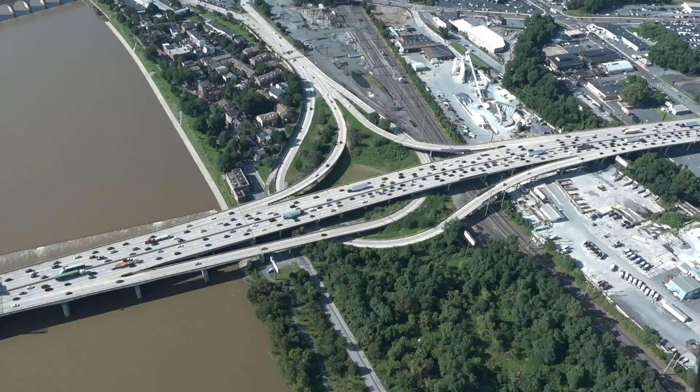Welcome, and thank you for taking the time to learn about the I-83 East Shore Section 2 and East Shore Section 3 projects. Over the last year and a half, the Pennsylvania Department of Transportation and the Federal Highway Administration have met with the Tri-County Regional Planning Commission, local municipalities, and other transportation stakeholders to gather input to aid in the preliminary engineering phase. This video will provide an introduction and history of these important projects in the Harrisburg area and will present the recommended preferred alternative for each section that have been developed through the alternative analysis process.

The project team values your interest in these I-83 projects and will continue to work with the community to minimize impacts and future disruptions while improving mobility and safety for all modes of transportation in the area. The projects are located on Interstate 83, a key link in the Capital Beltway, which encircles the city of Harrisburg. As part of the National Highway System, I-83 serves as an important transportation hub connecting people and products. I-83 is also an essential travel corridor for people who live and work around the greater Harrisburg region.

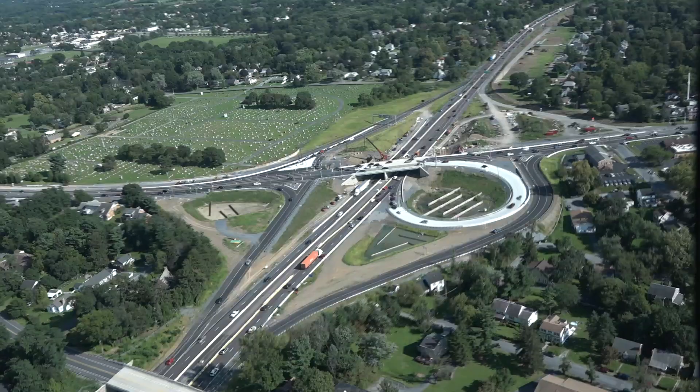The East Shore Section 2 and 3 projects are part of a series of improvements that were identified as part of the I-83 Master Plan completed in 2003. The purpose of the Master Plan was to identify transportation projects that would improve traffic operations and safety by providing an upgraded transportation facility that better serves its users. The plan established 4 sections along an 11-mile corridor between Interstate 81 and the York Split. The first of these sections, East Shore Section 1, which extends from the I-81 junction to south of the Union Deposit Interchange, is currently under construction. Construction is anticipated to extend through 2021.

The East Shore Section 2 project begins at the southern limit of East Shore Section 1, just south of Union Deposit Road, and continues along I-83 to the 29th Street Bridge overpass and includes the Eisenhower Interchange and portions of I-283 and US 322. The East Shore Section 3 project proceeds from the 29th Street Bridge overpass and continues south along I-83 to the Susquehanna River.

The West Shore section is the last of the 4 identified projects from the Master Plan. In 2015, the I-83 PA 581 Interchange Bottleneck Safety Project was completed in this area to relieve congestion and reduce the frequency of crashes. The Master Plan proposed additional long-term improvements, which include construction of a full-system interchange with PA 581.

The Section 2 and 3 projects are in the early stages of preliminary design and will address similar needs as Section 1, including aging infrastructure, chronic congestion, and safety concerns from existing outdated design features. Motorists on the interstate confront traffic incidents, difficult merge and exit maneuvers, and maintenance activities on a daily basis. The original pavement and bridges that were built in the 1960s have deteriorated to the point where total replacement is required. Additionally, by the year 2050, traffic volumes in some areas of the highway are projected to grow from approximately 110,000 to more than 150,000 vehicles daily.

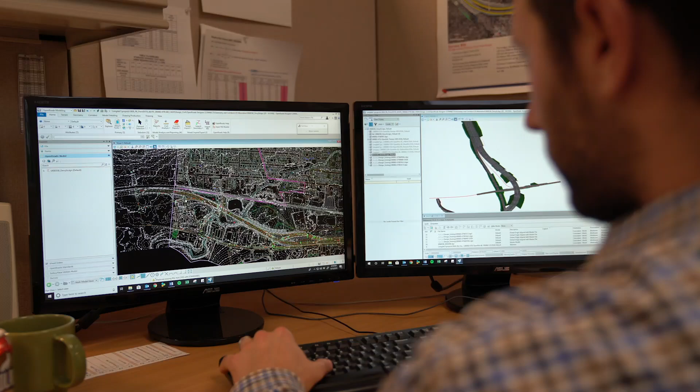PennDOT has worked closely with its consultant teams to develop and evaluate numerous alternatives, including options based on conceptual designs conceived as part of the I-83 Master Plan. Alternatives were developed utilizing current design standards, detailed traffic and survey information, environmental data collection efforts, along with input from community stakeholders. The project team has conducted numerous stakeholder meetings with adjacent municipalities, local schools, emergency service providers, Capital Area Transit, and the Capital Area Greenbelt.

Studies have included the identification of natural, cultural, and community resources, the examination of existing and future traffic volumes, the evaluation of where traffic is coming from and going to through origin-destination studies, and the evaluation of traffic control and construction sequencing. This detailed information has helped the project teams to develop and evaluate the preliminary design alternatives, resulting in a recommended preferred alternative for each project that addresses the project needs and minimizes impacts.

The challenges along the I-83 corridor include a densely populated area with many businesses, schools, community facilities, residences, historic and environmental resources. PennDOT's overall goal is to avoid or minimize impacts to these sensitive features when possible. Additionally, the National Environmental Policy Act requires the Federal Highway Administration and PennDOT to demonstrate and document how any required impacts to these resources will be minimized.

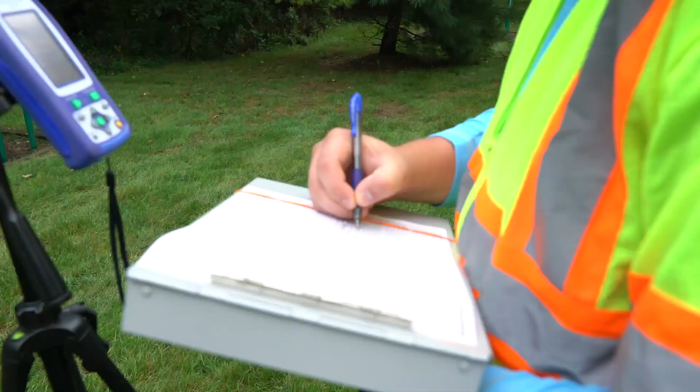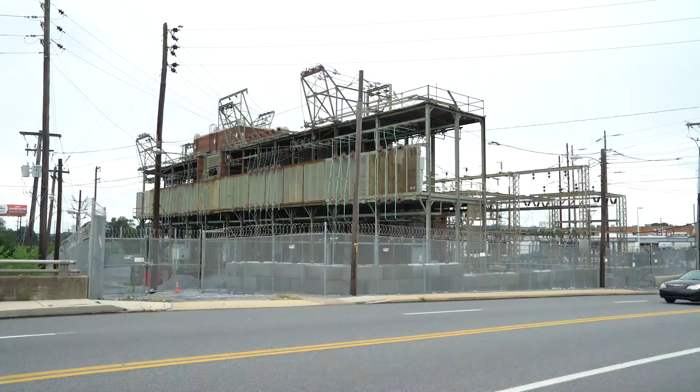The project areas contain historic resources that are listed on the National Register of Historic Places and additional properties that are eligible for listing. Natural resources, including waterways, wetlands, and endangered species, are also present and have been taken into consideration. Air quality and noise study areas were also identified and will be further evaluated as preliminary engineering progresses. Utilities and railroads, such as Norfolk Southern and Amtrak, also present challenges. Utility and railroad impacts can be costly and time-consuming.

Traffic analysis and maintenance of existing traffic patterns during construction had an important role in the development of alternatives and the evaluation of complex interchange dynamics. Traffic studies demonstrated the benefit of separating traffic with destinations in the Harrisburg area from motorists traveling through the region on I-83. As a result, the project teams are using designated lanes, also called a collector-distributor or CD system, in certain portions of the design. To improve safety and travel flow, through traffic will be separated from traffic merging on and off the interstate.

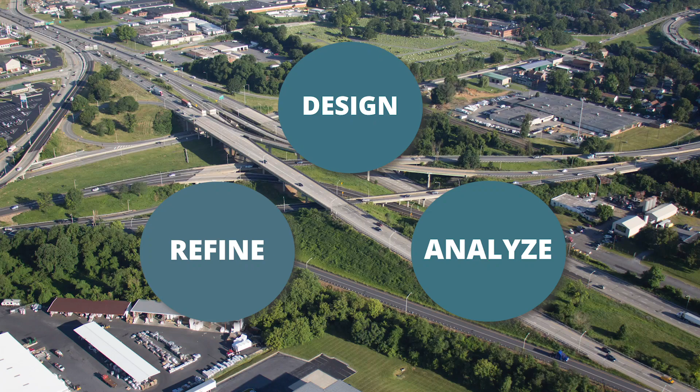Once all the challenges were identified, a cycle of designing, analyzing, and refining was used to develop, evaluate, and compare alternatives, resulting in a recommended preferred alternative. Impacts that may affect property owners, community facilities, and environmental resources will be further defined as preliminary engineering continues. If impacts are unavoidable, PennDOT will consider ways to minimize and address the impacts caused by the projects.

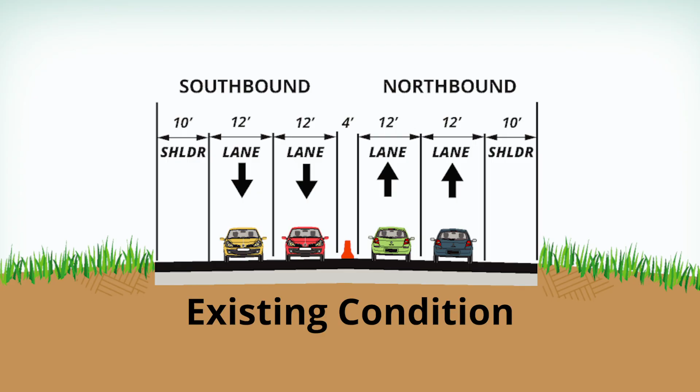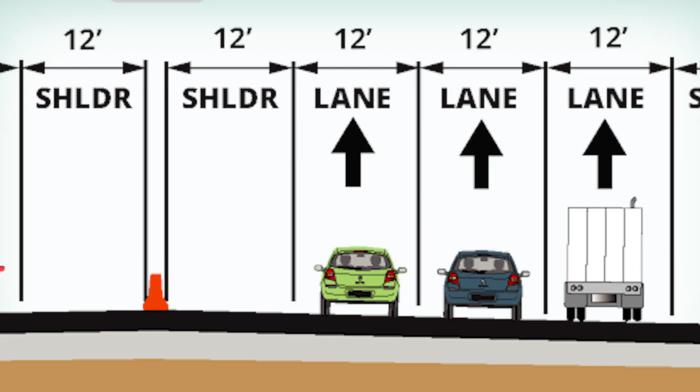The recommended preferred alternative for the I-83 East Shore Section 2 and Section 3 projects increases the existing number of lanes on I-83 to a minimum of 3 mainline travel lanes in each direction with a 55-mile-per-hour speed limit. To improve safety, the I-83 roadway for both sections includes widening the existing narrow median to utilize 12-foot median shoulders separated by a concrete barrier and 12-foot minimum outside shoulders. In addition, East Shore Section 3 and a portion of East Shore Section 2 utilize a collector-distributor system to serve local roads and intersecting highways.

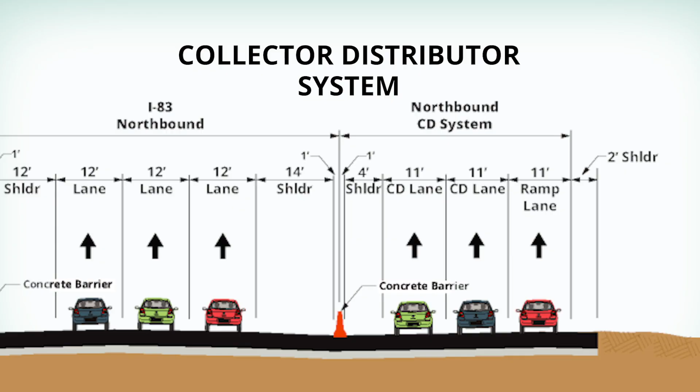To improve pedestrian and bicycle accommodations for the local roadways crossing I-83, the projects include widened shoulders and 5-foot minimum sidewalks. Taking a closer look at the preliminary design of the recommended preferred alternative, we begin at the Susquehanna River, which is the western limit of East Shore Section 3. Within the East Shore Section 3 project, improvements are proposed at the following interchanges: 2nd and Front Streets, a new interchange at Cameron Street to replace the 13th Street interchange, and the split interchange at 17th and 19th Streets.

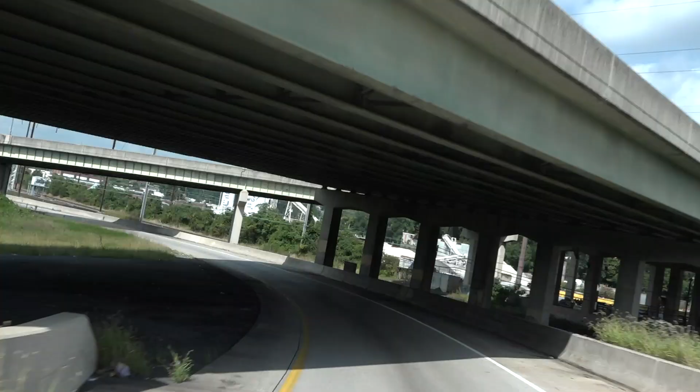The 2nd and Front Street interchange makes similar connections to I-83 as it does today. However, the northbound ramp connecting to 2nd Street will be realigned and widened to 2 lanes. The new ramp, shifted slightly to the south, provides the required clearances under I-83 and results in less travel impacts during construction. Other ramp improvements at this interchange will be constructed on the existing alignment. Just to the east of the interchange, the I-83 mainline collector-distributor system begins with 3 through lanes and 2 CD lanes to accommodate the local connections.

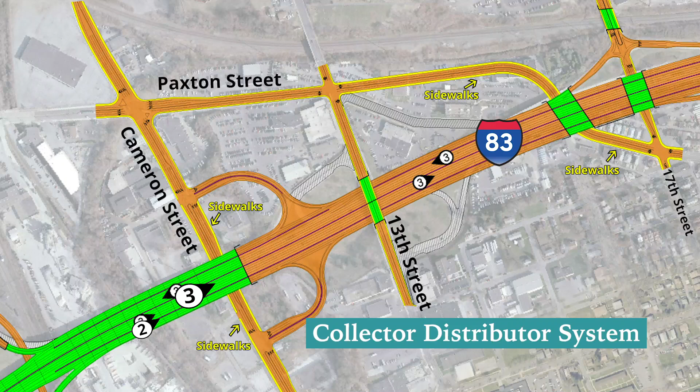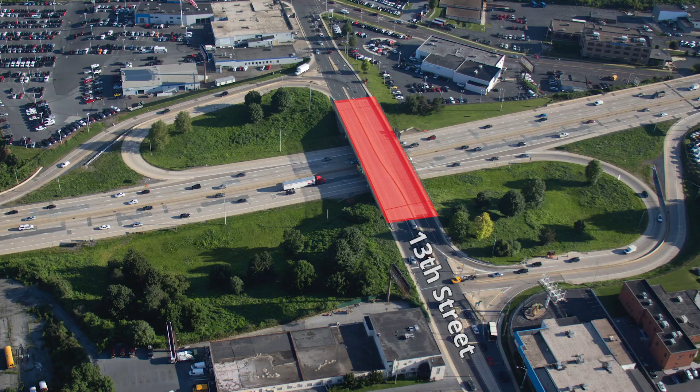Cameron Street connects directly to I-83, replacing the existing connection at 13th Street, providing easier access to downtown Harrisburg. Access from Cameron Street to I-83 northbound and southbound is provided using a partial cloverleaf design. The new connection provides direct access to the main north-south route, Cameron Street, and reduces traffic near Foose Elementary School at 13th Street and Sycamore Street. The 13th Street Bridge over I-83 is replaced to maintain the existing local connections across I-83.

Paxton Street is realigned between 16th Street and 13th Street, improving the alignment at the 13th Street intersection and reducing the size of the I-83 bridge over Paxton Street. Also in the vicinity of 13th Street, a ramp is provided in the southbound direction for local traffic to access I-83. Cameron Street will be widened to accommodate turn lanes and includes pedestrian and bicycle accommodations. Based on community input to preserve the existing local, residential, and commercial traffic patterns for access to I-83, the 17th and 19th Street interchange maintains the existing ramp configurations.

Both the mainline I-83 bridge over 17th Street and the 19th Street overhead bridge will be replaced. In addition, 17th and 19th Streets cross over the Norfolk Southern Railroad. These bridges are also being replaced, including improved bicycle and pedestrian accommodations.

As the northbound on-ramp from 19th Street joins I-83, the division between the main line and the collector distributor lanes merge to create 5 lanes northbound. Similarly, in the southbound direction, the main line will transition from a 4-lane section to 3 through lanes and a 2-lane CD road. This configuration continues from this area to the eastern limit of the East Shore Section 3 project at

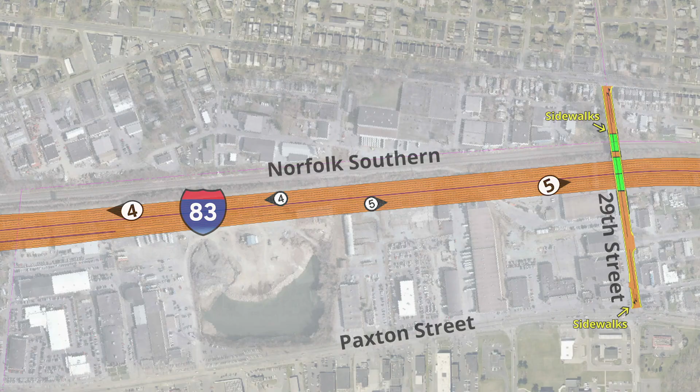the 29th Street overpass. The alignment of I-83 is shifted to the south to reduce potential impacts to the historic railroad property. To accommodate the widening and alignment shift, the 29th Street Bridge is replaced and will include improved pedestrian and bicycle accommodations.

From the 29th Street Bridge, the East Shore Section 2 project begins and extends to just south of Union Deposit Road. A focus of this section was to better the local roadway network that currently is limited due to the highway and railroad corridors dividing the area. Within the project, improvements will be made at several interchanges, including Paxton Street, the Eisenhower Interchange, and Derry Street. Additionally, local road connections to the east and west of the Eisenhower Interchange will be enhanced.

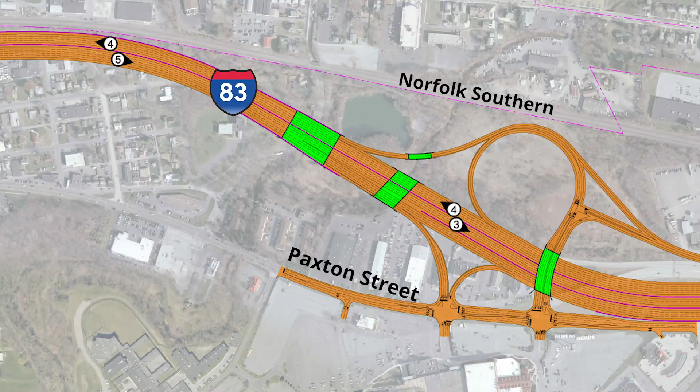East of 29th Street, I-83 continues with 4 lanes in the southbound direction, while northbound I-83 transitions from 5 lanes to 3 through lanes and a multi-lane collector-distributor system. All northbound motorists traveling to Paxton Street, I-283, US 322, and Derry Street will utilize the CD system to separate from mainline I-83 traffic.

The main line in this area was designed to minimize impacts to several historic, natural, and community resources. These include the historic Spring House, the Capital Area Greenbelt, the Rutherford House, and Paxtang Park.

East Shore Section 2 includes a complete redesign of the I-83 Paxton Street interchange near the Harrisburg Mall. The existing northbound 32nd Street and Wayne Street ramps will be eliminated. Instead, motorists traveling northbound will access Paxton Street via ramps connecting to the collector distributor system. These ramps will tie to Paxton Street at the current signalized location of the Harrisburg Mall's main entrance.

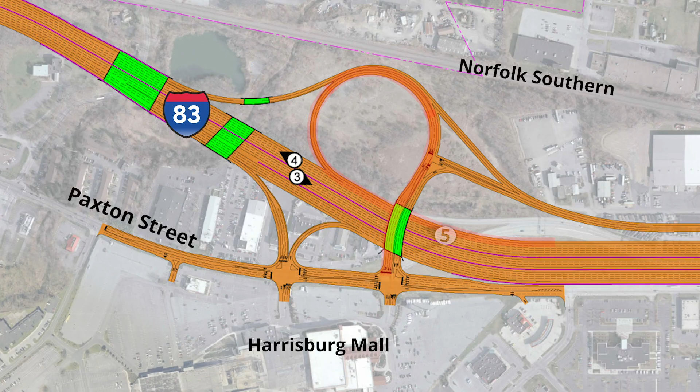Those traveling southbound will utilize a new loop ramp to access Paxton Street. The southbound off-ramp to Paxton Street will have a dedicated lane on I-83, creating 5 lanes southbound until the exit. The ramp to Paxton Street will cross over I-83 utilizing a new bridge. These southbound ramps will tie into Paxton Street at the signalized intersection located at the current Bass Pro Shop entrance.

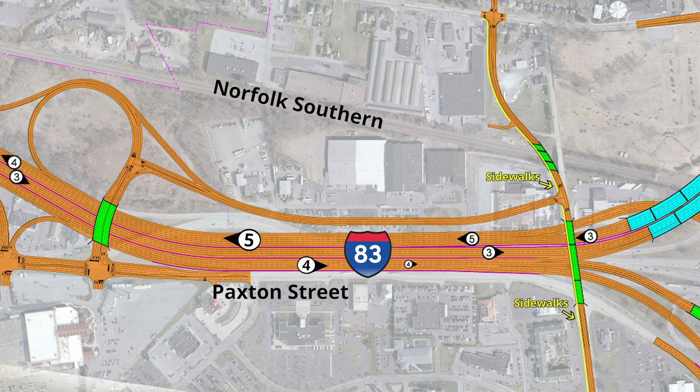Heading north, I-83 parallels Paxton Street, continuing 5 through lanes southbound and 3 through lanes plus the multi-lane collector-distributor system northbound. Approaching the Eisenhower interchange, the 3 northbound I-83 through lanes remain and the CD system will end with the lanes splitting to provide 1 lane that will join the other I-83 through lanes, 2 lanes to access US 322 eastbound and Derry Street, and 2 lanes to access I-283 southbound.

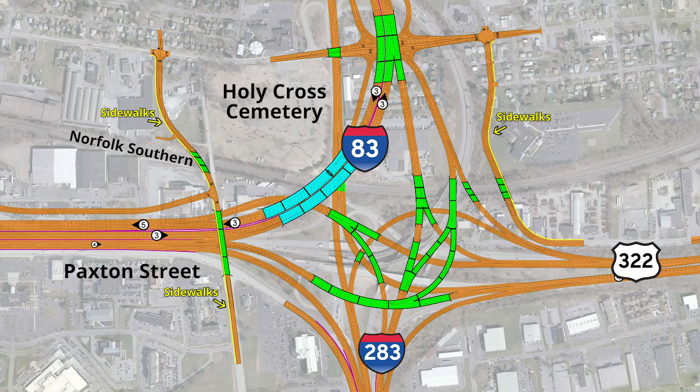The East Shore Section 2 project includes the redesign of the Eisenhower interchange. All the existing ramp movements will be reconfigured. Mainline I-83 will be shifted to the west between Holy Cross Cemetery and the interstate's current location, utilizing flyover bridges to span over the existing historic railroad property and new interchange ramps. Each direction of I-83 will carry a total of 4 lanes on these structures, including 3 through lanes plus a single lane ramp.

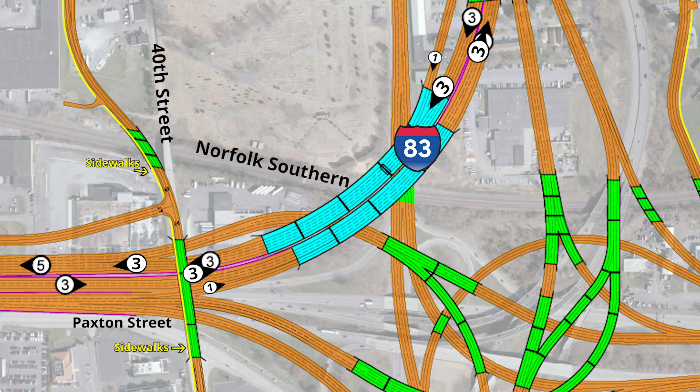Just north of the Eisenhower interchange, the partial interchange with Derry Street will be completely redesigned. The existing ramp configuration will be replaced with a single-point urban interchange, or SPUI. This type of interchange requires relatively narrow right-of-way and has the advantage that opposing left turns occur at the same time through a single traffic signal, and right turn movements are typically free-flow or yield-controlled.

All movements accessing Derry Street from I-83 will pass through this traffic signal, with mainline I-83 spanning over the intersection. This interchange will provide full access to and from Derry Street for I-83, I-283, and US 322.

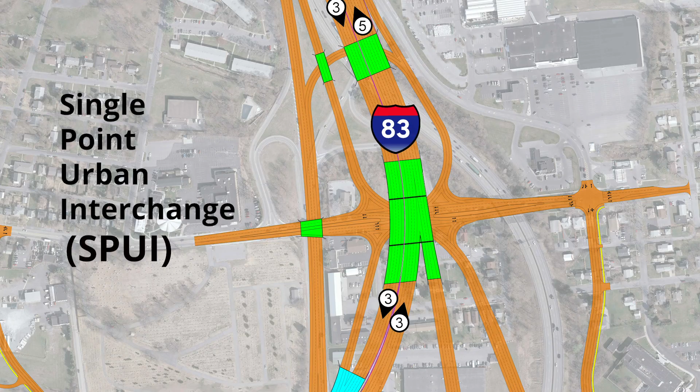As part of the redesign of both the Eisenhower and Derry Street interchanges, the two-way portion of Eisenhower Boulevard between I-83 southbound and Paxton Street will be replaced with an interstate ramp connecting I-83 southbound and Derry Street to both I-283 southbound and US 322 eastbound.

Eisenhower Boulevard will remain in its current configuration south of the intersection with Paxton Street. The existing signalized T intersection between Paxton Street and Eisenhower Boulevard will be removed and realigned to create a continuous roadway. With a change to Eisenhower Boulevard and need for an improved local roadway network as noted during public outreach, 2 new connections will be built in the vicinity of the Eisenhower interchange.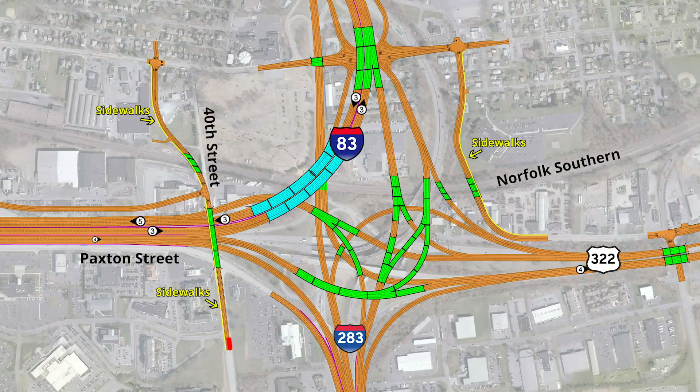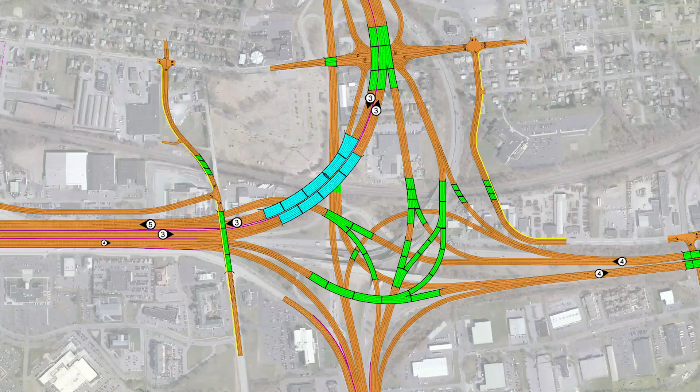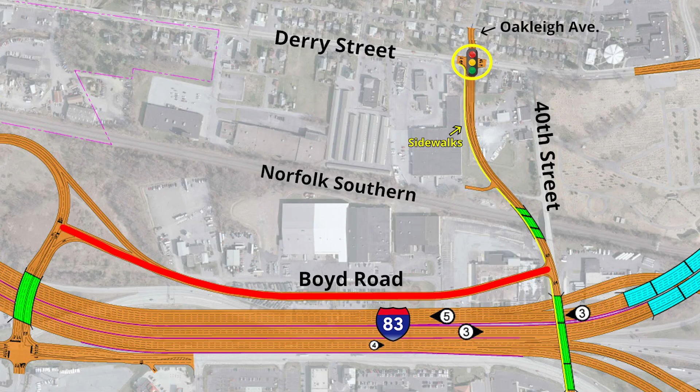On the west side of the Eisenhower interchange, existing 40th Street will be realigned and improved to include a bridge that crosses over I-83 and the railroad, providing a needed connection between north and south of I-83. The improvements include a new signal at the realigned intersection with Derry Street. Existing Boyd Road will be realigned and improved to provide a connection between 40th Street and the new Paxton Street interchange. The second north-south connection will be on the east side of the Eisenhower interchange.

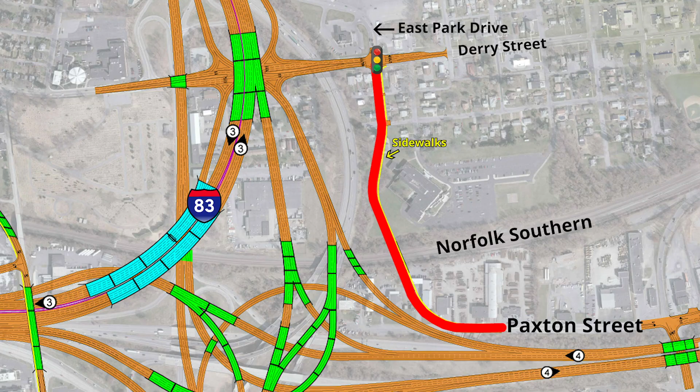Currently, Paxton Street dead ends just to the east of the interstate. The new connection will join this area of Paxton Street to Derry Street, across from East Park Drive, creating a 4-leg intersection. This connection and the 40th Street improvements will include pedestrian and bicycle accommodations. Beyond the Derry Street interchange, mainline I-83 continues to the north, tying in just south of the Union Deposit interchange. Interstate 83 through this area maintains the 3 mainline through lanes in each direction, plus ramp lanes.

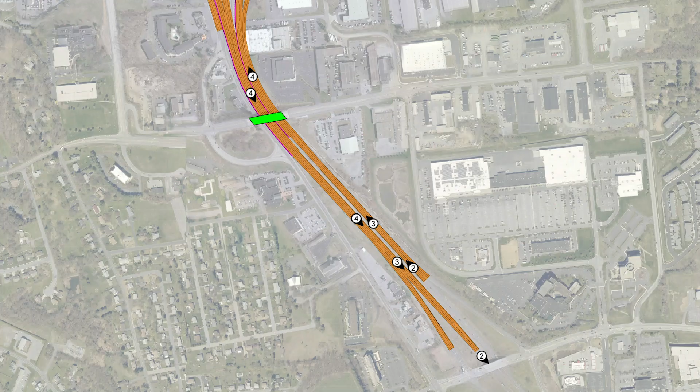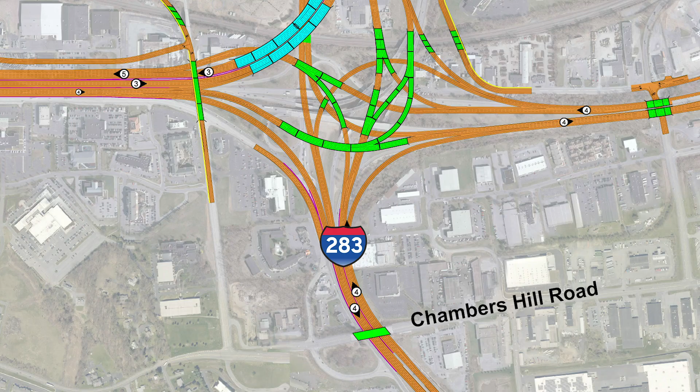With the reconfiguration of the Eisenhower interchange, modifications are needed to both I-283 and US 322. I-283 southbound will widen from 3 lanes to 4 lanes to accommodate the interchange ramps. These 4 lanes will continue south, transitioning back to the existing 2-lane section just north of PA 441 Lindle Road, with the exit ramp widened from 1 to 2 lanes. The existing 2-lane section for I-283 northbound will be widened from 2 to 3 lanes to accommodate a dedicated lane for the PA 441 Lindle Road on-ramp. Continuing north, a 4th lane will be developed just south of Chambers Hill Road, creating a 4-lane section that will proceed north into the Eisenhower interchange.

US 322 eastbound will also be widened to 4 lanes to accommodate the ramps from the Eisenhower interchange. The 4-lane section will continue to the east until the Penhar interchange, where the 4th lane will exit. The remaining 3-lane section will then continue east, transitioning back to the existing 2-lane configuration just past the interchange. Heading westbound, the existing 2-lane section will be widened to 3 lanes to accommodate a dedicated lane for the on-ramp from Paxton Street. A 4th lane will then be developed just west of the Penhar interchange, creating a 4-lane section that will proceed west into the Eisenhower interchange. Both US 322 bridges over Penhar will be replaced to accommodate the widened cross sections.

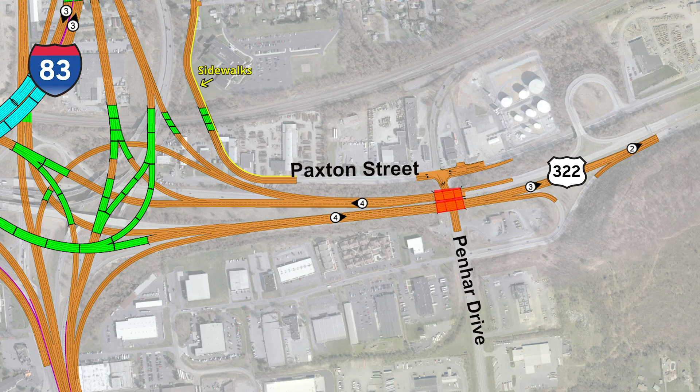The recommended preferred alternative for both East Shore Section 2 and East Shore Section 3 projects are the result of PennDOT's efforts to minimize impacts and future disruptions while improving mobility and safety for all modes of transportation in the area. As the recommended preferred alternative for the 2 projects are further refined, PennDOT will continue to work with local municipalities, communities, and project stakeholders to ensure potential impacts are minimized. Once environmental approvals are received, the projects can proceed into final design. Right-of-way plan development, coordination of utility relocations, as well as potential noise barrier coordination will begin.

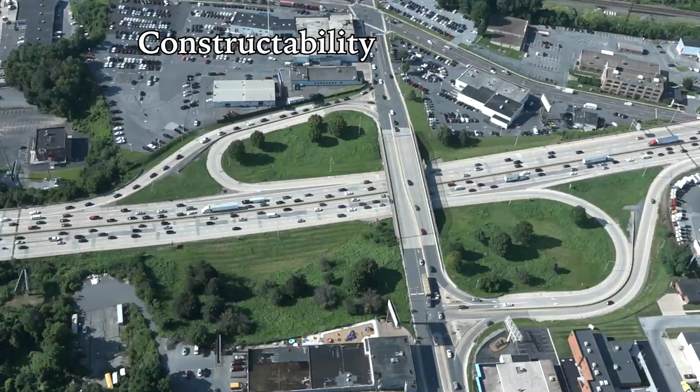Noise study areas determined in preliminary design will be further analyzed to designate which areas would warrant noise barriers. PennDOT will then conduct neighborhood meetings for these areas to solicit further input. Environmental permits will be obtained during this phase as well. Design techniques such as retaining walls and steepened embankment slopes will be considered to minimize impacts to the extent possible. PennDOT's representatives will fully assist impacted property owners through the right-of-way acquisition and compensation process. Construction will require multiple construction contracts and phases to best accommodate travelers and address all aspects of these complex projects, including constructability, traffic control, utilities, stormwater management, bridge replacements, noise and retaining walls, roadway widening, and new connections. The current schedule anticipates construction for the projects to begin around 2022 and extend through 2030.